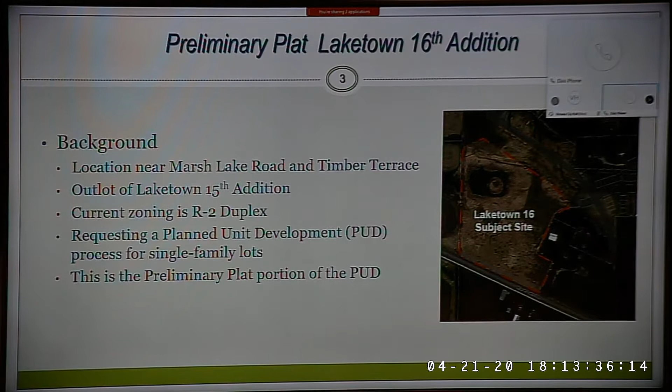The current site is undeveloped. The preliminary plat includes 25 lots for single-family homes on approximately 16 acres, of which 5.4 are wetland and 11.22 acres are buildable, located south of the existing Laketown neighborhood, west of Timber Terrace. The applicant is seeking a rezoning of the property from R2 to planned unit development R1, as single-family homes are no longer allowed in the city's R2 district as of June 10th, 2019.

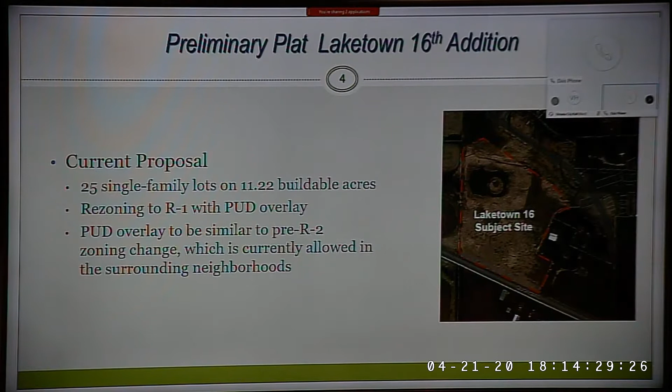The adjacent properties include a site bounded to the north by wetland and single-family homes, to the west by land zoned for future single-family residential, to the east by residential properties owned by the Simon family zoned as future single-family residential, and to the south by Marsh Lake Road and farmland owned by the Schmeek family.

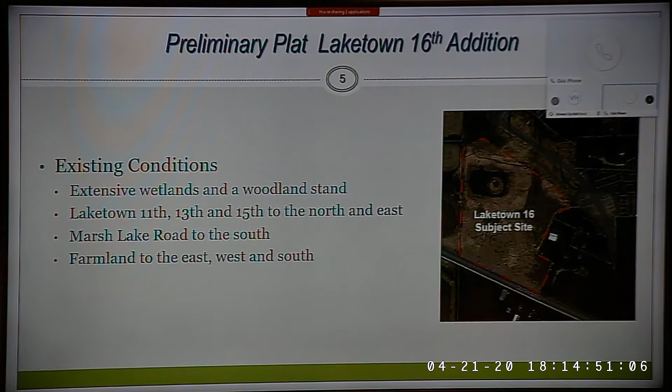Existing conditions include a site comprised of wetlands, open areas, and a woodland stand. There are large wetlands located to the northwest portion of the property and a smaller wetland located to the northeast of the site. Very little cultivated vegetation exists currently. Utilities are available to serve the development.

The applicant is proposing 25 detached single-family home lots that are generally 70 feet wide and 130 feet deep. The result is a density of 2.23 units per buildable acre. The current guiding for the comprehensive plan is that this is to be low-density residential, as described in the 2040 plan.

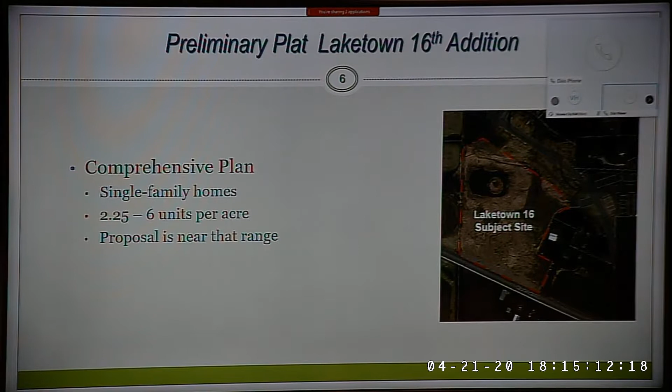The lot configuration for the proposed PUD has setbacks similar to those from the removed R2 single-family zoning, which allowed for 8-foot side yard setbacks, 25-foot front yard setbacks, a total lot size minimum of 7,500 square feet, and a buildable height of 35 feet. The City Council amended the zoning code in 2019 to remove this standard and replace it with R2 duplex zoning.

The applicant is proposing 8-foot side yard setbacks, 25-foot front yard setbacks on Bridle and on the north side of Catkin, 20-foot front yard setbacks on the south side of Catkin, 30-foot rear yard setbacks, and lot sizes ranging from 8,500 to 14,000 square feet.

The subject site was originally platted as an outlot in the Laketown 11th Addition and was then replatted as outlot B in Laketown 13th in August of 2019. The outlot is zoned R2.

The R2 zone change allowed for grandfathering of any platted lot as of June 2019, including those with applications pending. Because there are no buildable lots platted on the subject site at that time of the zoning change, this site is not to be grandfathered into the old R2 zoning.

The applicant is requesting a PUD in lieu of the former R2 zoning standards. The PUD is a tool that would allow the city to consider changes to the zoning standards in exchange for greater achievement in stated Victoria development goals.

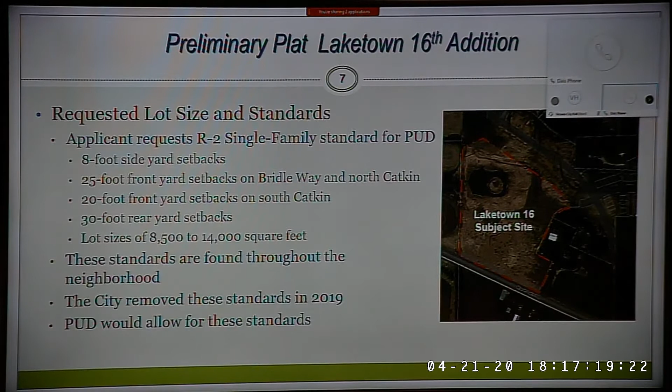Access to the development will be a road extension on Bridle Way. Homes will be accessed off the Bridle Way extension and the new public street currently referred to as Catkin. The new public streets proposed are at a standard right-of-way of 60 feet and a roadway width of 28 feet. An original concept plan of the subject site included a connection to Marsh Lake Road.

However, this connection created site development constraints and issues, and staff was supportive of its removal as the access would likely provide only a short-term benefit. Catkin Court is envisioned to extend into the Simon property to the east and to the Kelzer property to the west to serve possible development in the future.

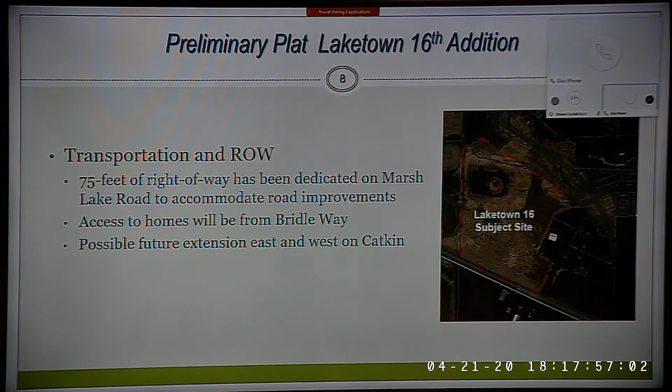Utilities, sewer, and water are available with the construction of Laketown 13. A minor extension will be provided to services for the proposed neighborhood. Stormwater ponding is proposed to the northeast side of the development, and it will be required to meet Minnehaha Creek Watershed District standards.

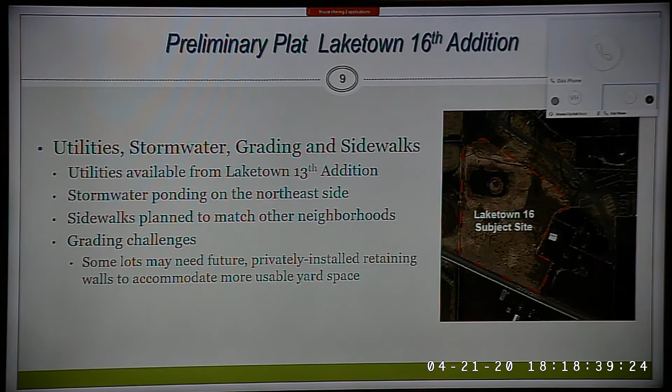Grading on the development will be done in a way that accommodates runoff and also avoids installation of private or public retaining walls as part of the development. However, there are some lots, including lots 1 through 3 and 6 and 7 on Block 2 and lot 11 on Block 3, that have significant slopes of 16 to 25% rear yard slopes, which may require homeowners to install a retaining wall to attain more usable yard space in the future.

Trails and sidewalks: there is an existing sidewalk in the Laketown neighborhood north of the site along Timber Terrace. The proposed development includes a sidewalk that connects the existing network to the north. The preliminary plat includes sidewalk on the north side of Bridle Way and Catkin.

Regarding screening and landscaping, the applicant is asking for an exception to the city's berm requirement, which requires a 40-foot wide buffer in combination with an 8-foot earthen berm along Marsh Lake Road. Due to the desire of the developer to achieve the proposed lot density, a berm meeting the prerequisite standards cannot be realized. In lieu of a full berm, the developer has proposed a half berm or partial berm with planting efforts to meet the screening intent of the berm requirement.

The Commission and Council should determine if this proposed berm and planting meets the intent of the city's requirements. The proposed berm planting plan currently does not meet the requirement of Section 33-6 of the city zoning ordinance, which requires 3 overstory trees, 5 evergreens, and 3 ornamental trees for each 50 lineal feet of required berm. The required berm length in the development is 760 lineal feet.

The required and proposed numbers of the plans are as follows: the required are 45 overstory trees, 75 evergreens, and 45 ornamentals. The proposed is 0 overstory, 99 evergreens, and 18 ornamentals.

It appears that the submitted berm plan proposes that the city consider an alternative method for computing the required landscaping using caliper inches and plant height rather than actual quantity. Staff are open to this methodology. However, based on brief review of the proposed plantings, the calculations provided do not appear to meet what staff would consider to be the requirements based on an alternative method. The final landscaping plans must meet required berm plantings.

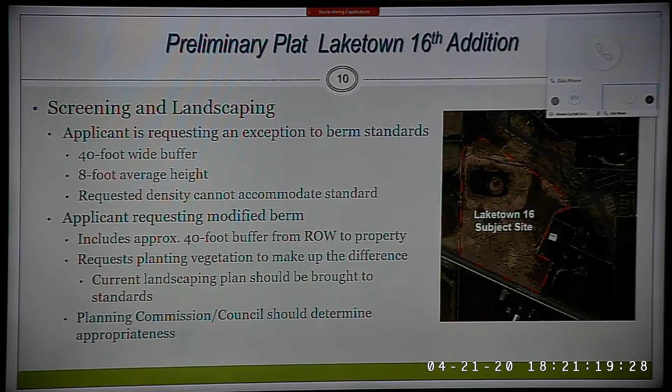In an effort to perhaps offset the increased density and reduced lot size being requested as part of the PUD, the Planning Commission and City Council could direct the developer and staff to plan to replant or reforest strategic areas within the two city-dedicated outlots. Details of this type of planting would need to be further discussed and reviewed as the project progresses. Staff is seeking direction from the Planning Commission and Council related to this issue.

And here's a slide here that goes with that. Just one moment.

In addition to that, for engineering, typical of most preliminary plat approvals, the developer has been provided a letter from staff, which is attached, outlining several engineering-related items that should be addressed in any future final plat application. If the preliminary plat is approved, these items should be conditioned to that approval.

For rezoning, the property is currently zoned R2, an action that occurred during the replat of Laketown 11th and Laketown 13th in August of 2019. The property is guided in the comprehensive plan as low-density residential. The property would need to be rezoned to planned unit development with an underlying zoning of R1 low-density residential, since we only allow single-family residential in the R1 zone. If the preliminary plat is approved, approval of final rezoning to PUD should be conditioned into that approval.

Just as a side note, the PUD is described in the city zoning ordinance as follows: the purpose of the PUD ordinance is to allow innovative, creative, and flexible development that is sensitive to environmental, cultural, and economic considerations in partnership with public values as outlined in the comprehensive plan. A PUD is subject to additional requirements and standards when, in the opinion of the City Council, it will protect the general welfare, public safety, and neighborhood character. A PUD shall not be approved simply to circumvent zoning ordinance regulations that prohibit development under typical zoning regulations. That is part of our code here.

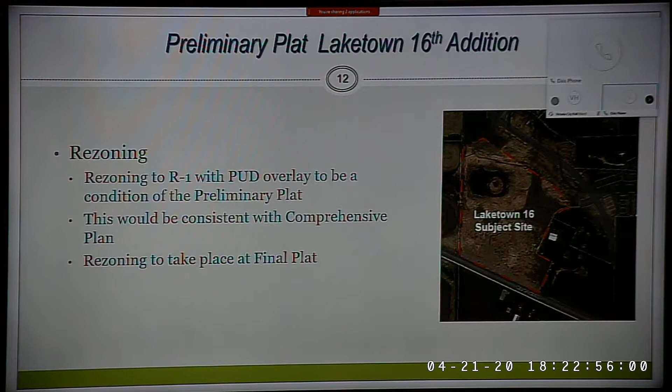We have requested action. The Planning Commission is requested to conduct a public hearing and to make a motion of recommendation to City Council. There are a number of options available to the Planning Commission. They can make any one of these motions to recommend: approval as submitted, approval with conditions, which must have a clear connection to the project, or they can recommend denial with findings of fact.

With that, that ends my review. There's a number of attachments as well that are available for review, both online that we can look at, or they could be viewed online. And with that, I can turn it over to the chair.

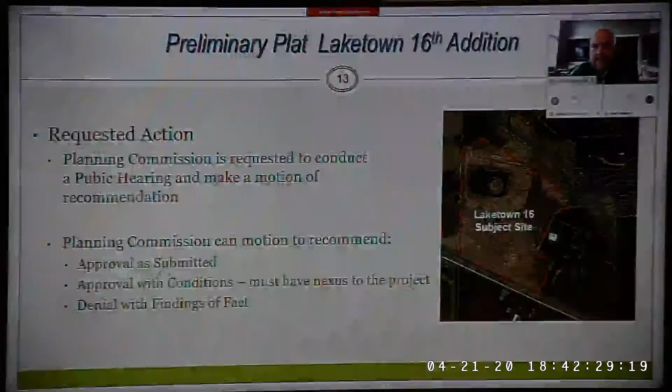Commissioner Kuhn? Yeah, I guess I'd like to maybe hear from Lennar about some of the concerns on the pathway issues that John Carlson brought up. And also on the reasoning for the berm, I still don't understand why we can't have the ordinance berm put in there, and what their reasoning is for trying to make it smaller. I guess there are a couple questions I have, and I don't know if Paul just wants to address these afterwards or how he wants to comment on those.

Well, I definitely want to get to everyone, but I think going through this, there's going to be two that really do stand out. I think it's going to be the berm, and I agree with John Carlson, it's going to be the pathways.

I'm going to speak for myself for a second with the berms. Commissioner Moore has been with me on this. We had the opportunity to sit and work with the city council at some workshops with consultants that work for the city. One of the things I've noticed that they pointed out is berms, and what a great job our community has done with berms.

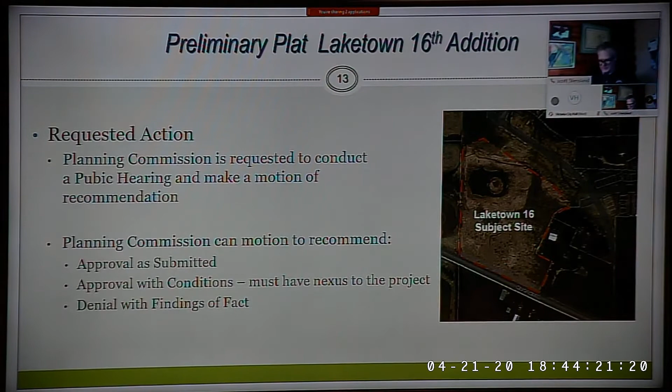You drive down County Road 11, County Road 43, and there's evidence of that. And that happened because of city planners who, like John Carlson mentioned, had the foresight to look ahead. I do think Marsh Lake Road in 20 years is likely to be built out on both sides, north and south. And I think that takes some hard decisions to look that far in the future. But I think a standard berm, as required, is really essential to this community.

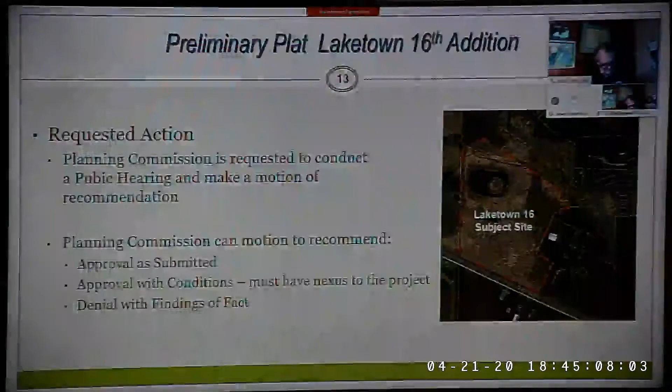Paul, I know you're here, and I wonder if you could maybe start by addressing that. Yes, Mr. Chair, members of the commission, happy to address that comment as well as the others that were made. If you don't mind, I could just go in order because I was taking some notes.

Sure, okay. So to the comment about the trails being paved along the north side of Marsh Lake Road, back in 2015 Lennar did dedicate a 75-foot half-width for Marsh Lake Road for future development of the road. At the time, the discussion was that the full improvement of Marsh Lake Road was going to be 150 feet wide. I believe since then it's been reduced.

I've been talking with Kara Guerin on it, and my understanding is that the council has kind of gone a different direction. That being said, the city still has that 75-foot half width. When we were looking at trying to wrap up the design of this last piece of Laketown, we talked with city staff about how we were going to make this work, because the slopes in that area are pretty steep. In fact, I want to say it's roughly a 20-foot fall from the edge of Marsh Lake Road as it is right now to the back of the home sites that we're proposing.

So what we discussed with the city, and this dovetails into my next point, is the berming. The way the ordinance reads, there's supposed to be a 40-foot separation, with an 8-foot earthen berm that's landscaped. Because of the grades that fall from the road, you're not able to quite get a large berm there unless you bring up the entire site or lower Marsh Lake Road. So it's a pretty difficult situation, and I'm sure the city engineer can speak to some of this.

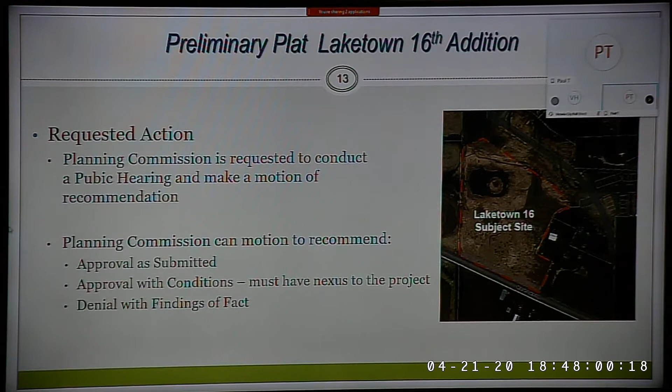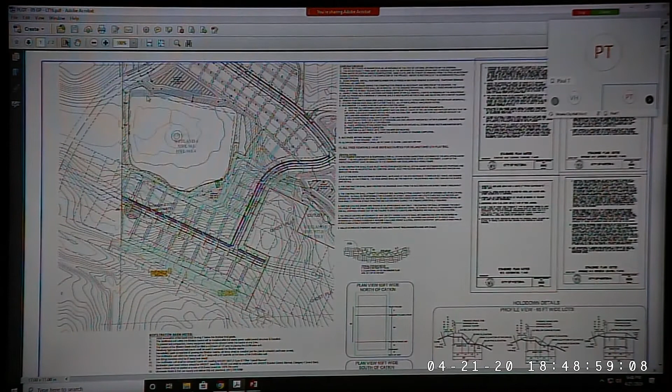Okay, so on the western portion of that site, or of the community, or the proposal as it is, we have roughly 10 to 12 feet from the top, or the edge, I should say, of existing Marsh Lake Road down to the back of the home sites. So in effect, what you have is the road and then a slope down to the home sites. It's about 10 to 12 feet, which would function as the backside of a berm. That's the half berm approach.

Now, as you continue to go east, that berm - our engineer has actually increased the grading and the mound that comes back from the road. Tying in from the existing edge of Marsh Lake Road, that edge is set at about 1022. Our home sites are roughly around 1,000, so you're talking about 20 feet of elevation falling from that road. That entire slope from the edge of Marsh Lake Road to the back of our lots ranges from 10 to 22 feet in height and effectively functions as the backside of a berm.

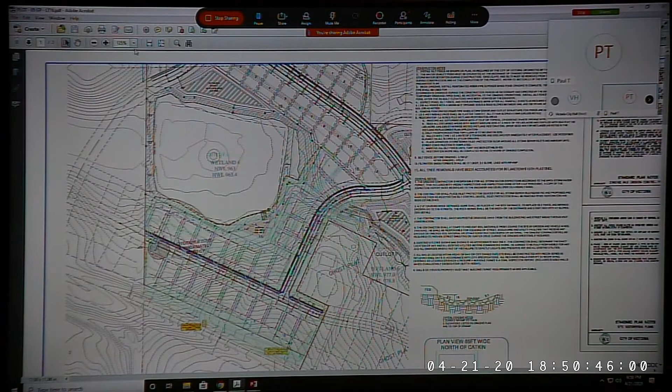The other thing I want to point out is we talked about screening a pretty significant tree line there, but the concern with city staff was that eventually Marsh Lake Road might have to be expanded, although I'm not sure it will be. Maybe Kara can speak to that. We originally had a 30-foot buffer of trees at the bottom of the slope - you can see on the grading plan those green and blue lines where the slope and contours get tight dropping off from Marsh Lake Road. We worked with city staff to put 2 rows of coniferous trees right at the bottom of that slope, so you have a slope down to a row of trees, and that's where our home sites begin.

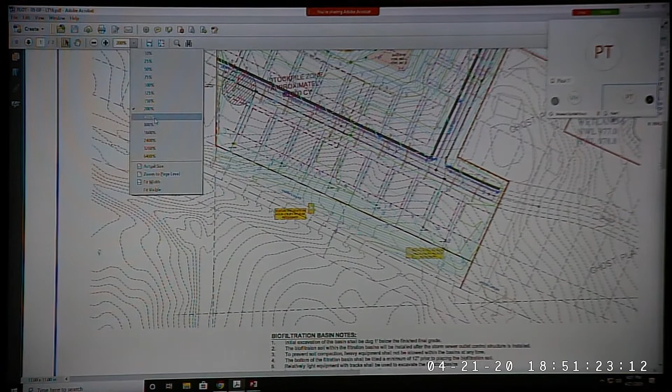What we're trying to do is meet the intent of the ordinance with a 40-foot separation. If you look at the site plan, we dimensioned roughly 40 to 50 feet from the back of the building pads of those home sites - another separation from the back of the building pad to the edge of the right of way, to the edge of Marsh Lake Road. It's kind of hard to go through, but that's what we're trying to do to meet the intent of the ordinance. We did take that into consideration because we know that is a very important project piece, and we wanted to implement it to the fullest extent feasible without having to massively fill everything and build a berm and bring the remainder of the site up, because the site slopes down so quickly from the existing road.

So if I understand you correctly, at that north edge of Marsh Lake Road, there's still going to be a significant drop from that ditch down to those houses. That's correct - the north edge of Marsh Lake Road.

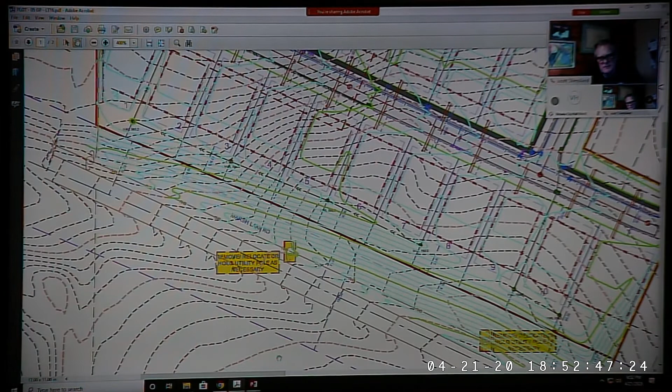Let me see if I can find the exact contour - I'll point you right to it. So you see lot 2, or lot 1, block 3, those 2 easterly home sites? Do you see the green line just south of the red line? That's a 990 contour. The next green line, you can see two. Can whoever's running the slide zoom out so everybody can see where he's referring to - those 2 green lines.

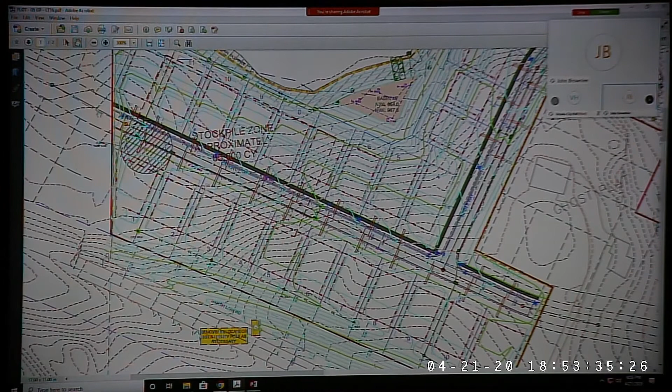Zoom out. Zoom out a little bit so you can see the whole development. That's better, I think that's clear. Sorry to interrupt. No, it's fine.

My point is south of lot 2, block 3, you see 2 green lines among all the blue lines, right? The first green line is a 990 contour, the second green line is a 1,000-foot contour, and then you see the road. So my point is that from the road to those lots, you're falling at least 10 feet, probably closer to 12 to 15 feet, which serves as the backside of a berm. It's a landscape slope that we're proposing because of the height of the road relative to the proposed height of those home sites.

As you continue further east, right around the edge of Marsh Lake Road, you're at 1,022 or 1,020. Then as you go down to lots 10 and 11, you're back to that 1,000 contour. So you're almost 20 feet of a slope coming down onto those lots, and we've taken that into account. We have a half berm approach, the backside of a berm that we're proposing to landscape with trees, and still achieve the screening along Marsh Lake Road, because those lots are so much further down than the existing road itself.

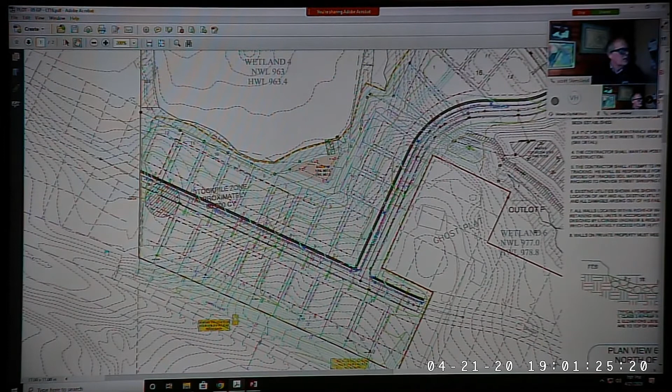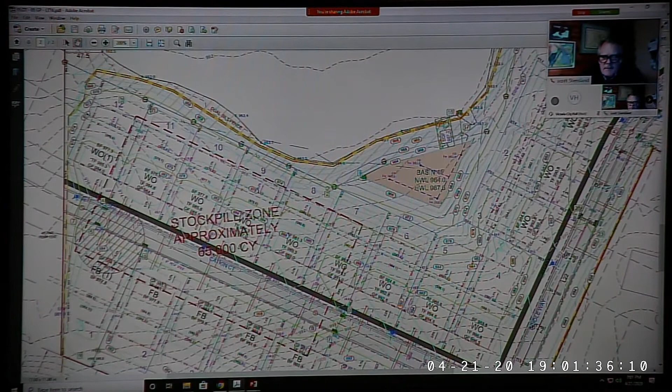I have another question. This is not so much berm related, just to the grading along Marsh Lake Road. Paul, if you could - right now you're looking at map 9 of 42, could you go to one down, map 10? Or I'm sorry, I've got a different screen open. I'm looking at that - can you just go to, I don't know which one you're at, but can you go to 10 and zoom in on it so we can see the entire slide?

Just one moment. Yeah, no problem. Thank you. It'll be a moment while you load the packet.

While we're waiting for it to load, I can answer the stockpiling question.

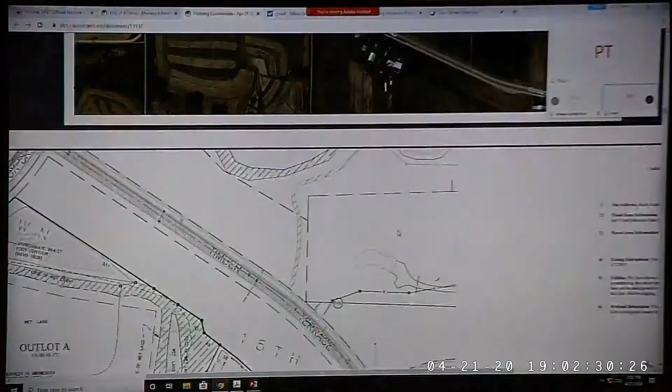The stockpiling was done last year when we were grading our townhomes. We realized we were going to need additional dirt in this area when future development came. So we worked with Minnehaha Creek Watershed and the city to obtain a grading permit that allowed us to put material down here, knowing we would need the dirt in the future. It's been done in accordance with proper grading permits and watershed procedures.

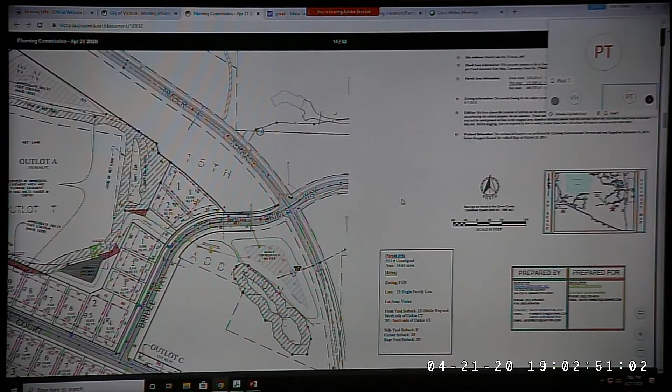Right now, that's what we're going to be using that dirt for, is to bring up those home sites and ultimately make the site work so that water flows and drainages can work as well. So it is accurate that we are going to change some of the grading, but it ties into the overall master plan for the community.

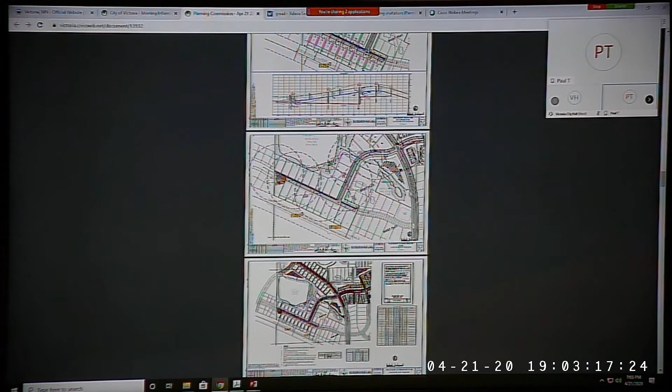I guess that's what's difficult, is we're on our last piece of property here of a very, very long build out where rules and regulations have changed many times, and we're just trying to implement what the original master plan was for the area.

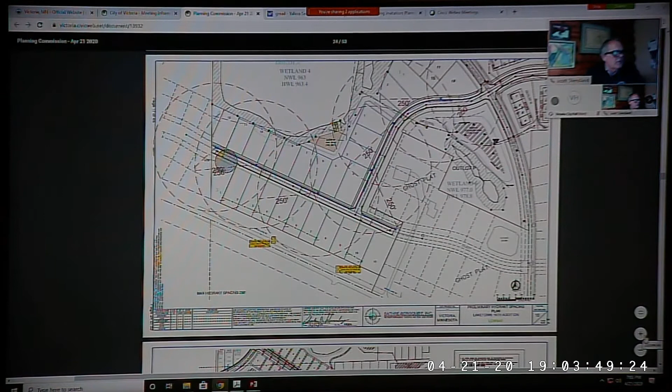Understood. While Paul's bringing that up, it kind of falls into my question. When he gets the picture up, the map, you see a side profile view of Bridle Way, and you can see the grading that's going to be done. From my looking at this map, it explains why that stockpile is there, because it looks like it's in excess of 20 feet of fill being added along portions of Bridle Way.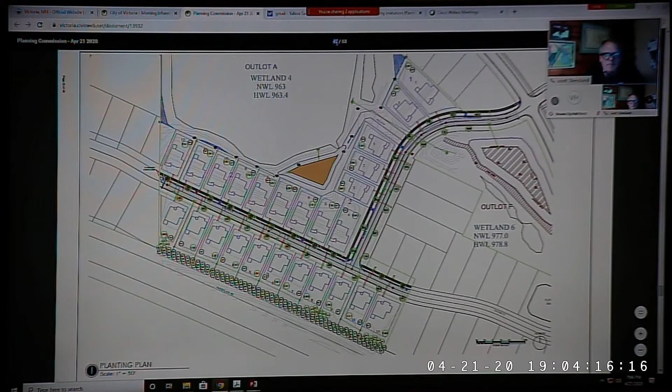I believe Kara's on the line. I know we've, as a city, experienced some difficulties with settling, and I am not an expert, but when I see 20 feet of fill, that's a huge concern with settling. I wonder if we've thoroughly vetted that, if it's been addressed.

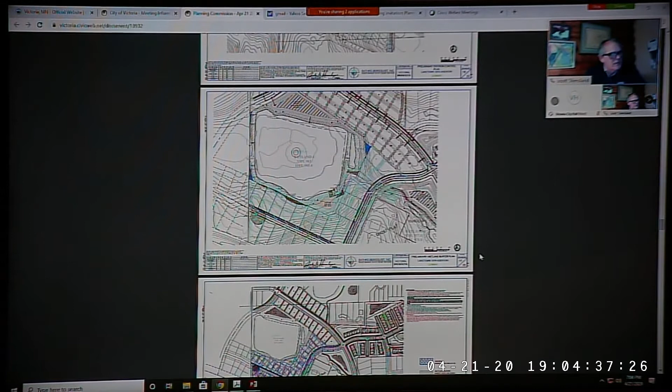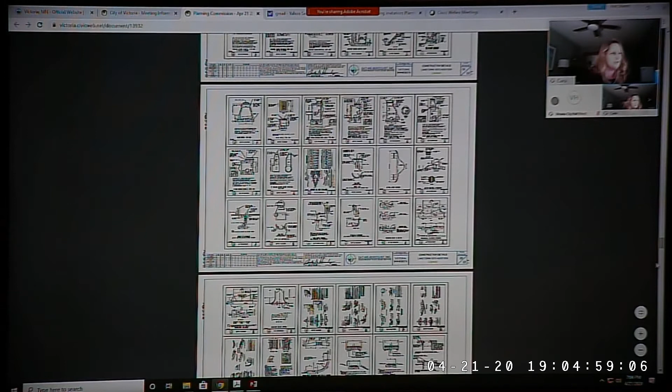I'm going to turn on my video so you can see me. Chair and members of the commission, I'm assuming you're looking for me to respond to that question. I would appreciate it, thank you. Sure, for those I don't know if I've met all of you, I'm Kara Guerin, the city engineer, so I've been involved in this process throughout the project.

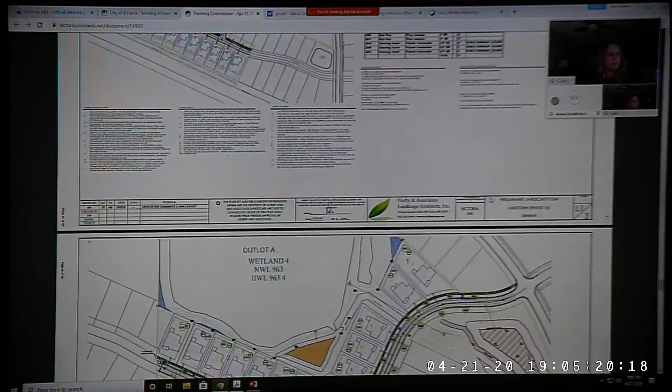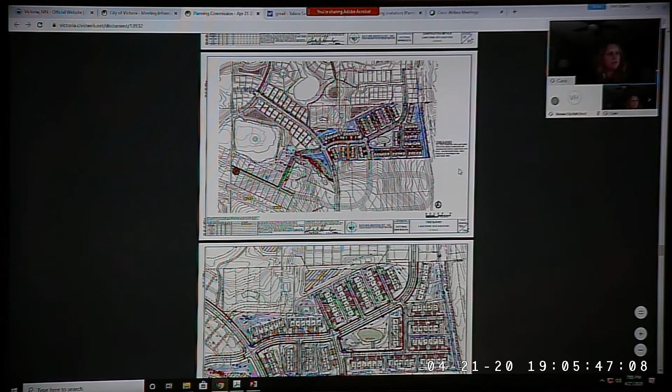I would note that the site is particularly challenging when it comes to grading. Paul was alluding to and referencing the amount of fill across this area that they're having to contend with. Whenever you're going in to develop a property and grade lots, you have certain minimums and maximums for grading that you have to meet in order to construct lots. So it isn't uncommon for grades to be changed. The city's role is to make sure that the final grades meet the minimum and maximums allowed by the city's design standards and city code.

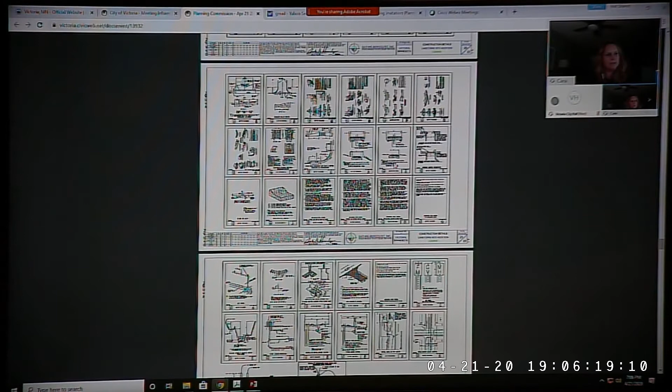In terms of the placement of fill, many different sites will have significant amounts of fill placed. The developer is required to employ the services of a geotechnical engineer to monitor, test, approve and sign off on all of the grading on the site. So that would occur here and has, similar to other developments throughout the city. It's a pretty common process.

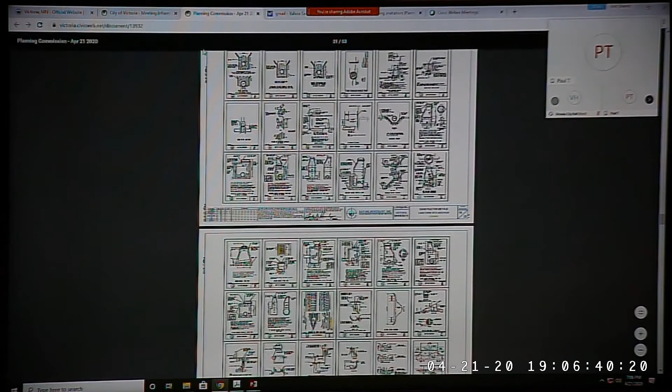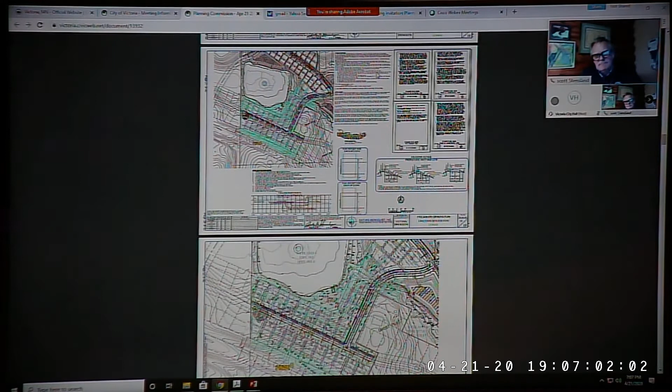So we're still looking for that. Right now it's a pretty large file, so it's freezing our system. Do you remember which page number or PDF page number that was? In the PDF, it's 17 of 53. 17 of 53, yep. We will go there, get it up. Okay.

Commissioners, any other comments or concerns as we wait and kind of go through?

It's Mary Jo, I have a question. Visually, I have trouble looking at a flat piece of paper and picturing hills, etc. Is there any place in Victoria or neighboring cities where the berm requirement has been altered to accommodate the topography? Any place we could look and see?

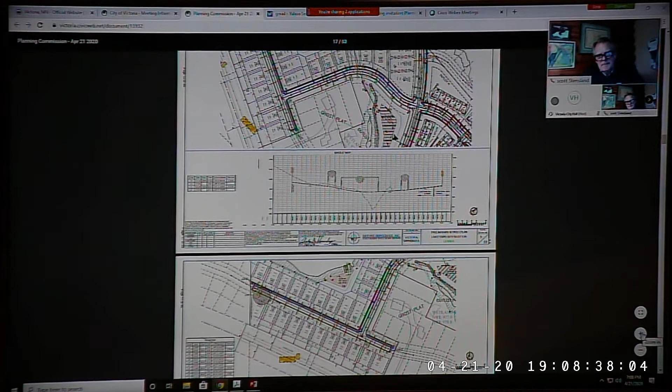Well, one place, right here on Marsh Lake Road, it was brought up earlier by Jen Mulhaville. On the west side of Marsh Lake Road, the berm is not to ordinance. Okay, because it was part of the development at that point. Because Marsh Lake was thought that it's going to change and take it out, so it's lesser. Other than that, I don't know offhand.

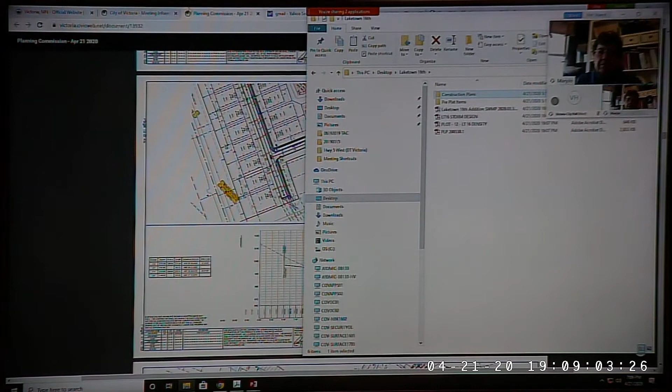Chair, members of the commission, this is Marty. We actually did go out and snap a couple of photos of that earlier. I don't know if Paul or Alyssa are able to pull up a photo of that western portion of Marsh Lake Road where you can maybe get a visual of what something like this looks like. Yeah, I think it's one of the last photos in that PDF, if I'm not mistaken.

It's page 44 of that PDF that shows it. Okay, we'll go to that.

I mean, it's not the greatest. Yeah, Paul, if you guys were able to pull those photos, I think they give a little better visual. This photo's a little squished together, kind of hard to see. Yeah, it was a little wonky.

Was it on the shared drive, Marty? Yes. And I don't know, Alyssa, if you can give me the ability to share my screen, I can pull it up on my screen too. Right now, let's have do that. You know, and as you're doing that, I have another quick question.

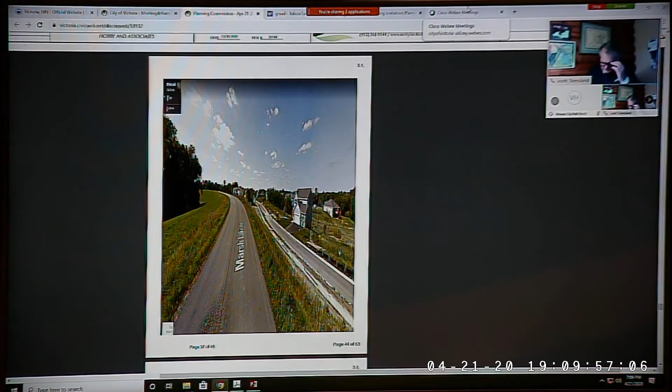And looking at these maps, I was not able to determine. Looking at the sanitary sewer, is any of this currently lower than 25 feet?

Chair and members of the Planning Commission, the sanitary sewer is all less than 30 feet deep. There's one section right at the intersection of Catkin and Bridle that's about 29 feet deep. But it's within standards, or within what we would allow as an exception to our standard. It's a real challenge because, again, of the grading on the site. We looked at a whole lot of alternatives with their engineer to try to minimize that. That's part of the reason why the connection to Marsh Lake Road got eliminated. Eliminating that connection really helped improve the engineering design on the infrastructure.

Okay, this is Marty again. Go ahead. I'm sorry, I was just going to say I'm going to share this image now, so hopefully you can see it, which I think gives somewhat of a visual of what that looks like with the top of the berm at the road height, and then the drop down with coniferous trees and screening.

This is Mary Jo, I have a question. If you built up the street side of the berm, then you'd have to have a major retaining wall on the property side, is that correct? In other words, to make it comply with the ordinance. That's correct.

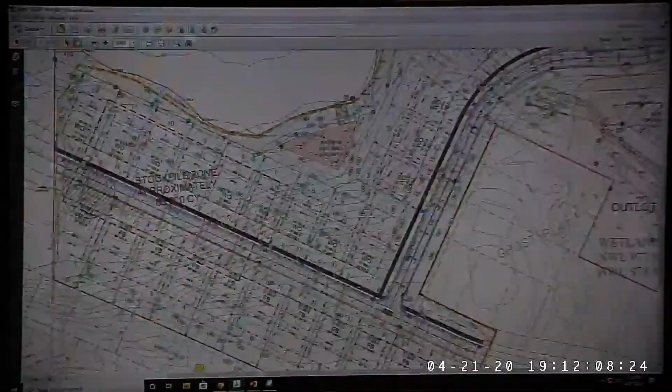If you were still to have lots on the Catkin side and you were to raise the grade in order to have that 8-foot height against Marsh Lake Road, you'd either have to do some pretty significant grading, or potentially have, or likely have, some retaining walls on the backside.

Thank you, Mr. Chair, members of the commission, Paul here with Lennar. We actually did entertain doing something like that, but it resulted in a fairly significant wall in the backyards of those home sites and kind of interfered with the storm drain that's in those rear yards as well. After kicking it around with staff, we opted not to go that route. That's another reason for this, actually.

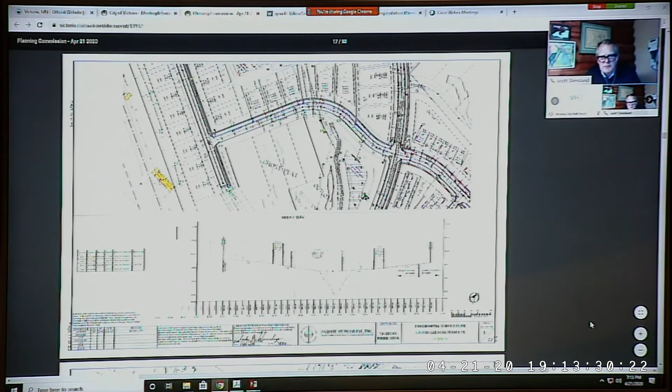Kara, since you're there, right of way was brought up. So with Marsh Lake Road and the city council planning for the future 20 years down the road, potentially widening it, they wanted to acquire right of way. So do I understand that correctly, that this does account for that? Yeah, the right of way is included? Yes, as Mr. Tebow noted, they actually dedicated right of way back in 2015, back when the road was planned to be a four-lane road. So they already did that, that's built into the plan.

And I would just note, concerning the construction of the trail, staff did have a conversation relating to whether a trail should be constructed at this time. The reason why staff did not recommend that be included is because we don't have a final design or determination for at what elevation, or to a certain extent, specifically horizontal location, Marsh Lake Road will be in the future. So if we were to require them to build that trail, which can be accommodated within the right-of-way that they provided, it is fairly certain that it would need to be removed and reconstructed at the time that the road was eventually reconstructed.

Assuming it is ever reconstructed at some point in the future. If the city decided to never go the county road route, but still wanted to go in and construct a trail along that portion, the right-of-way would be available for that construction to occur. Kara and Paul, was there any consideration given, if we were to compare this down, to the west far side of Marsh Lake Road, the developments in there have trail systems more linking these neighborhoods, the different Laketown additions together? Was that considered?

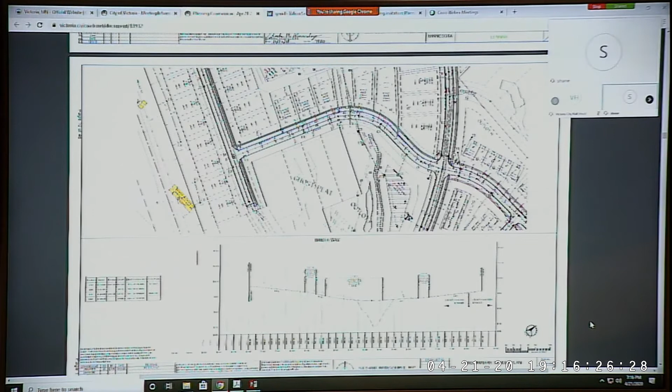Yeah, this is Shane Blazer. So even if you look, if you go to the corner of Highway 5 and Bavaria, there is a development south of Highway 5, and it's down a pretty significant hill where there's not much of a berm. You can still see many of the houses, even with trees, and the drop is much farther than what you're looking at there on Marsh Lake Road. Although they did try to hide it with a significant amount of, looks like, natural wildflowers and other landscaping alongside Highway 5.

My other comment is on the trail. I think leaving an easement, or the option for development there in the future, is probably the best bet until there's a plan for Marsh Lake Road.

Yeah. Yeah, I have just a general comment. I guess I'd like to kind of get some feedback from the commission. And...

I'm just looking at this project, how it fits into a PUD, considering the berm. Right now I'm looking at the agenda report, second page, bottom of page 2, beginning of page 3. I'll read from it: a PUD is a tool that would allow the city to consider changes to zoning standards in exchange for greater achievement of the stated Victoria development goals. Generally, the city has noted its desire to preserve and protect natural resources, establish a park trail network, a greenway system, and establish significant berms and screening of new development along county and state road systems.

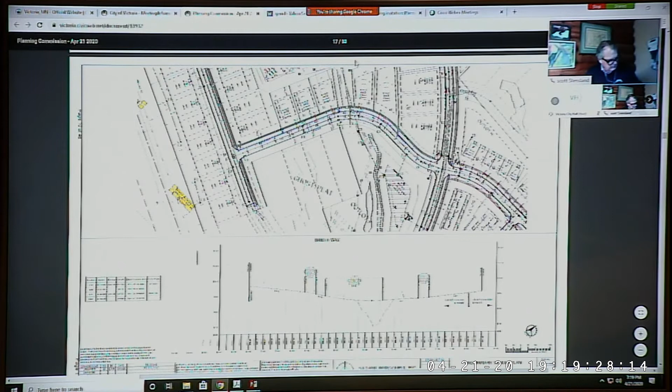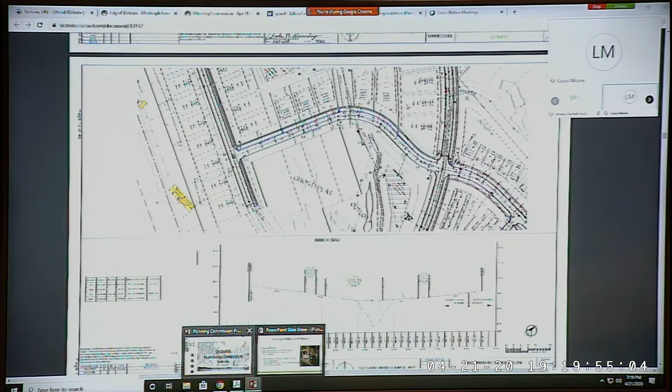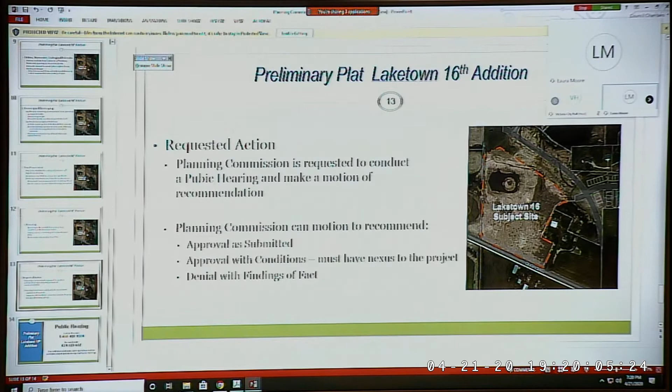Any other commissioners have any comments on that? So I think, I look at this and I just think, okay, what's another solution? What's a solution where we get our berm and it can be done from an environmental standpoint, just with the grade change there? This is not the hard corner, so I question if the depth of the berm could be less than 8 feet. If it was the hard corner, I think we would need to definitely try to stay close to the 8-foot depth. But I'm just curious if that is a potential solution that could visually accomplish what we're looking for.

Laura, you said hard corner—what does that mean?

So the site is not at the hard corner. Let me pull up my aerial so I can walk you through it. By hard corner, do you mean like at the corner of 11 and Marsh Lake? Yes, right, so it's up the way a little bit. Exactly, it kind of wraps to the left a little bit—to the east, excuse me, the west.

I understand your point there, but I think you could argue that this may even make it more important for the hard corner. If we were to allow something like this, recommend something like this happen here, we set a precedent potentially for all of Marsh Lake Road. I would agree with that.

Is this slope from the north side of Marsh Lake Road down to the potential development area consistent along the length from here east to 11? Sorry John, I think you might need to say that again, couldn't quite hear it. So is the slope from the north side of Marsh Lake Road down consistent from this plot east all the way to 11? In other words, would additional developments along Marsh Lake Road to the east have the same issue? I'm looking at my map to see if that's a question that makes sense—do you follow what I'm asking there?

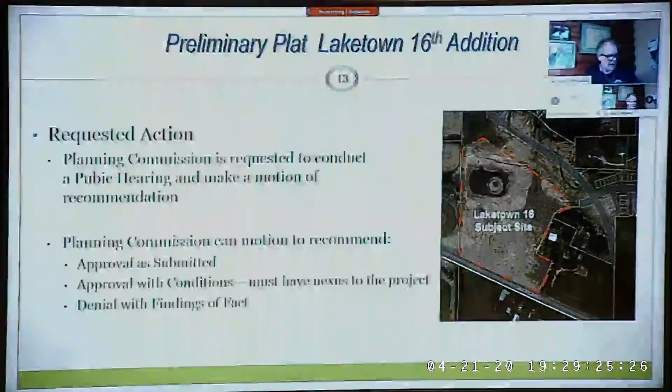Mr. DeBone, this is Scott Stensland, and I hope, since I made that comment, I hope you did not consider my comment to mean in any way that Lennar has been anything less than a great partner throughout all of the development of Victoria, because that was not my intent whatsoever. No, but I absolutely agree with you that this is the last piece of it, and it is on Marsh Lake Road, and Marsh Lake Road in 20 years is what we need to look at as a major thoroughfare here.

I have a concern with that lack of a berm. I also have a concern just the sort of the drop off even into the houses from that road. I just wish there was, and it sounds like there may be another way to look at it. I mean, okay, so we can consider some bushes or something in the back. I would step that up. I would ask that get stepped up, and we consider a berm for ordinance.

Yeah, I would just add to that, everything that you just went through, which is great, are table stakes and cost of doing business for doing major developments in a city like Victoria. It's not that, Scott, it's not that it's not appreciated. But I think Laketown 16 needs to be evaluated on its own. To your point, so I think I understood what you were saying, but I do think that we should evaluate this development on its own merits.

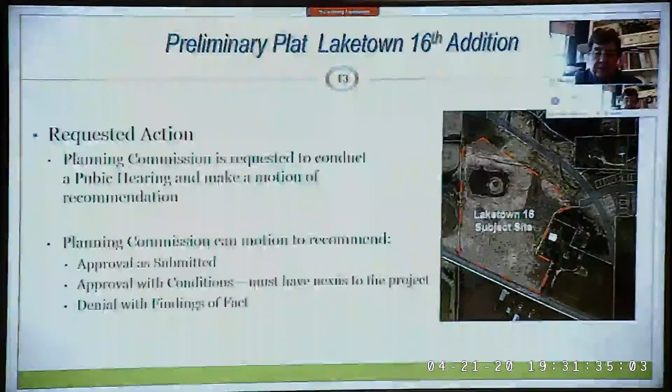We actually have. That's a great neighbor right down the way. Sorry, Paul, go ahead. Oh, I was just going to say, we actually, on our design team, have retained a licensed landscape architect. I'd be happy to, and it's the same one that's done the landscaping in every other phase. So I'd be happy to ask our landscape architects or also our installers to see what might be acceptable, if that's something that the city wants to see. Enhanced planting on the back side of the slope. That's what I'm hearing right now?

Well, that was a recommendation from Mary Jo. I think I'm going to kind of stick with what I had said before. I don't think planting is going to take care of this. My wish would be that we would consider a berm as ordinance requires. I think in this situation, as we discussed earlier, front side, back side, it doesn't matter which side of the berm. I think they are equally important, maybe more so important from the Marsh Lake Road side, looking at the homes. And in my opinion, planting is not going to replace that.

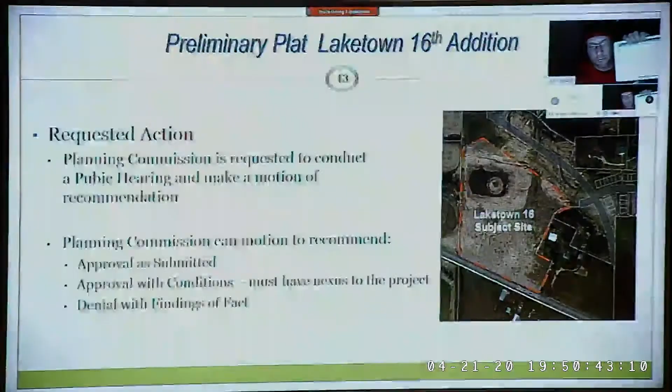Thank you. The rendering - you don't have to be on Google Earth, you can see on Google Maps. That's a really good suggestion. The rendering can be drawn with all those assumptions, with how it's drawn or designed today, with an evergreen that's 10 feet tall based on the drop and grade at 15, 16 feet. These are things that architects can create.

This is Christian. Yeah, I was just saying there's a way you could kind of see what it looks like now today, and that sounded like that was something that you guys were looking for. That's all, nothing more.

I think if we were to consider that, it would have to be something that comes from - I mean, of course you can go to Google and look at it, but for accuracy, if it was something we were to consider, it would have to be submitted to us through Lennar, through their architects. Obviously we don't expect that right now because we didn't ask for it. But that gets us to, so where do we go from here?

And that's the million dollar question. I was kind of working down the list. We've heard from the last commissioner, Commissioner Swarting. Do you have any additional comments? No, not at this time. Okay.